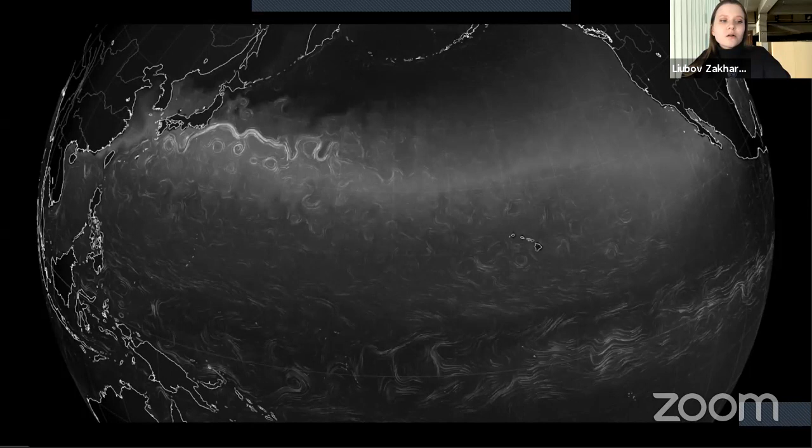The surface of the ocean is familiar to humans. Long in our history, humanity explored this world through sailing and learned about the currents and wind forces that exist in this incredible environment. Our project site is the dynamic and ever-changing Pacific Ocean, both its surface and its depth. We started by exploring the vertical and horizontal currents and how they interact with the wind forces.

However, this free and open space without national borders has been gravely affected by humans. The Pacific Ocean is where the world's largest garbage patch is located. Due to the directions of global ocean currents, plastic is being concentrated into ocean gyres. There are 5 major garbage patches around the world, 2 of them in the Pacific Ocean, and the one between Asia and North America is the largest.

This is what the garbage patch looks like. Plastic is one of the major environmental harms. This material cannot decompose, and only 20% of global plastic waste is recycled. The rest is burned, causing excessive CO2 emissions, stored in landfills, or dumped into rivers, from where it finds its way into oceans. It harms the ocean, marine inhabitants, our coasts, and all other living species that depend on the ocean.

According to a variety of scientists, historians, and ecologists, we're experiencing a 6th global extinction, where many species aren't able to adapt to the constantly changing environment. Plastic pollution is just one of the major issues causing this.

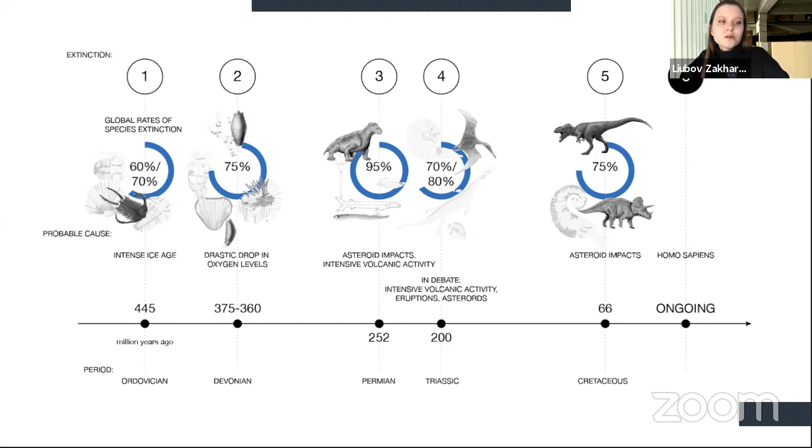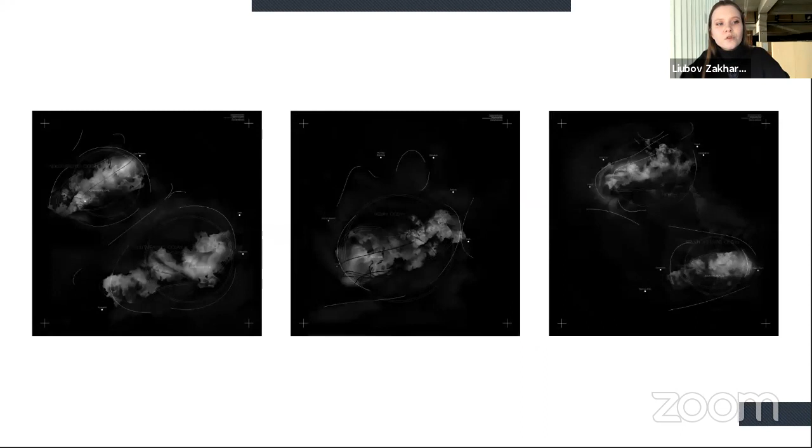Together, the garbage patches form a new continent on the surface of the ocean and create destroyed ecosystems on Earth. These are the 5 oceanic garbage patches in respective order. We modeled the patch in order to understand its mass and its density.

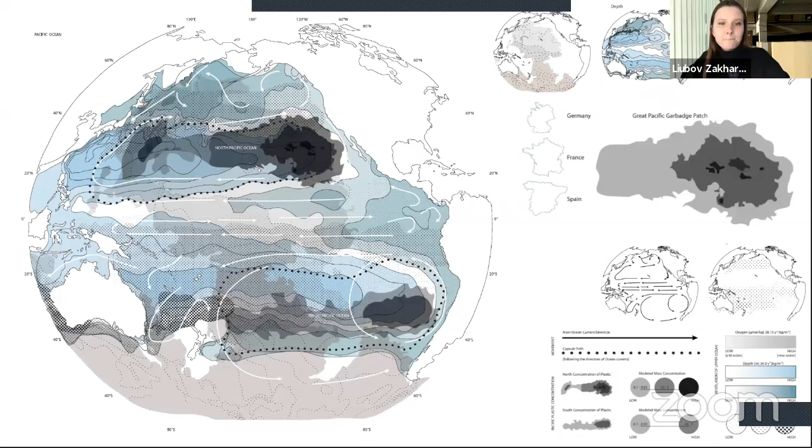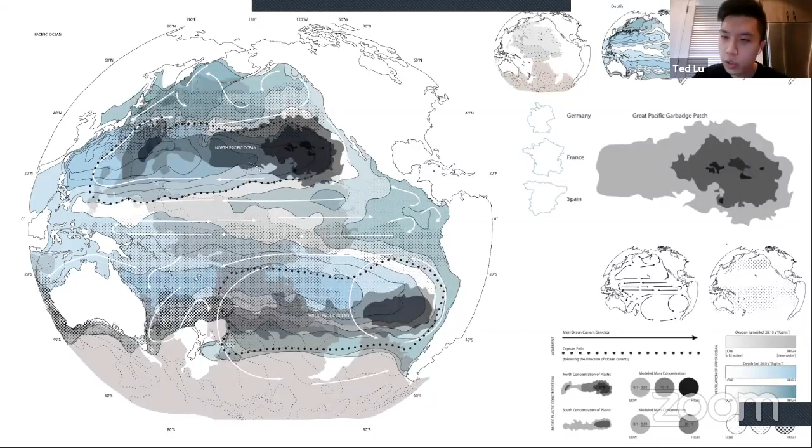The ocean is an interconnected system. The oxygen, depth, salinity, and current all affect each other. The concentration of garbage patches results from the current system, which can influence the local oxygen density of the ocean. When compared to Europe, the garbage patch is three times larger than France.

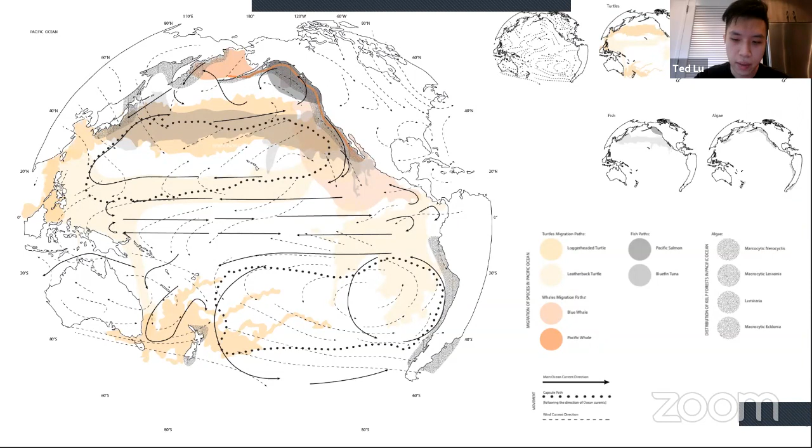Marine species also migrate through the oceanic system. Their travel path follows the local currents. Some of them have become endangered because of plastic pollution.

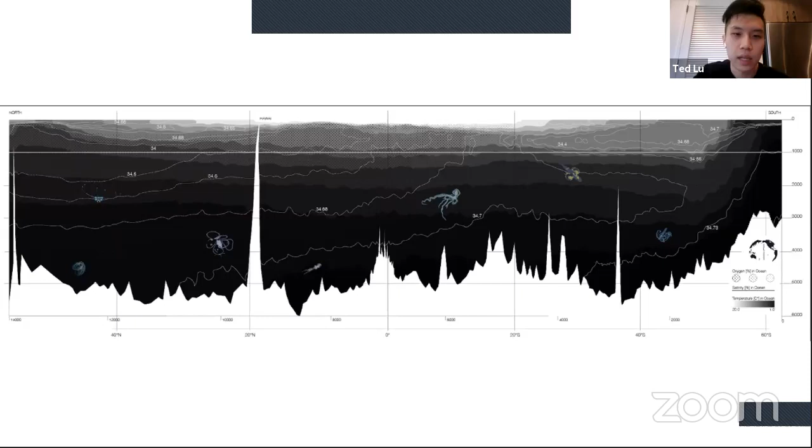Our mission is to clean and preserve the surface of the ocean for the species that need to be saved now, and explore the depths of the ocean for life forms we can learn from.

Our architectural proposition is aimed at resolving the issue of garbage patches by collecting ocean plastic and recycling it into building material on site. Our project is not static, it moves cyclically. The proposed project moves from the east coast of Asia to the west coast of America across the Pacific Ocean.

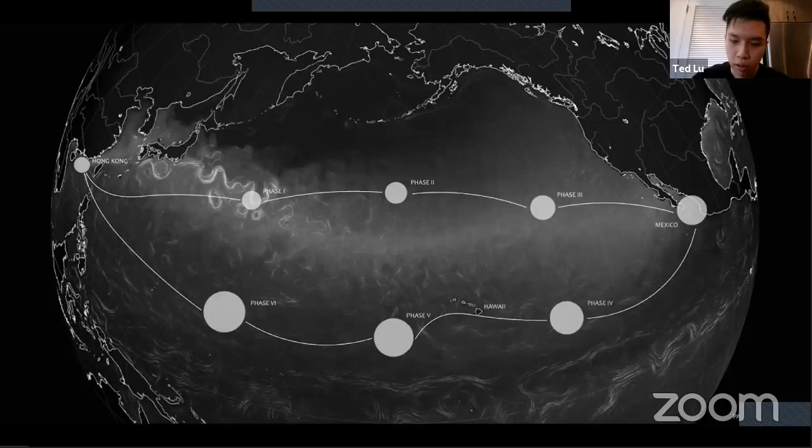We started by analyzing the 2-dimensional local currents and their motion, and transforming them into 3-dimensional forms. We created a simulated site to test how the capsule would be affected by currents, in order to study the performance of this capsule on water.

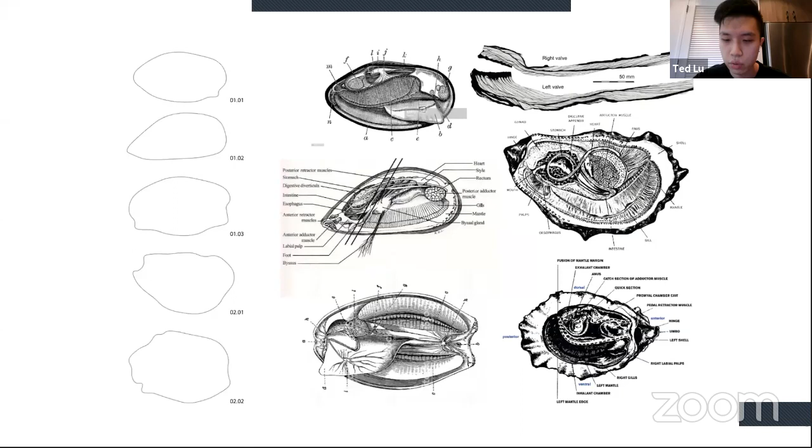Then we developed the interior space of the capsule. In order to develop the interior, we looked at the multiple layers of oysters. Each layer has its own function, which structurally holds the muscle in place and protects it from outer threats.

We hybridized the study on the performance of the oyster with a physical model exploration of the interior space, which resulted in oval capsules that shelter different living things, including humans, algae, and marine species.

The different capsules float at different levels of the ocean. Therefore, we integrate a vein ballast water system on top of the skin, which controls the buoyancy of the capsule by taking in or releasing water.

This technique comes from our experience with growing algae. We observed how algae is able to float vertically in space instead of laying flat.

On the right is a vein system when it's flat, and on the left is a system flowing three-dimensionally on the skin. The transparency of the vein structure was originally designed to create an area that could be habitat for a free relationship between two organisms, a photosynthetic microbe such as microalgae and a compatible microbe.

The photosynthetic microbe is able to convert sunlight to sucrose, which is consumed by the compatible microbes. Materials such as pigments and luminescent substances then form.

We learned that several deep sea species use bioluminescence to communicate, in order to attract prey or defend against predators. The same idea can be applied in a vein-like system to attract species we want to study, or defend against potential threats. To simulate this, we use quinine, which has the physical property of glowing in the dark. We then mix quinine with colored pigment to produce glowing liquid in different colors.

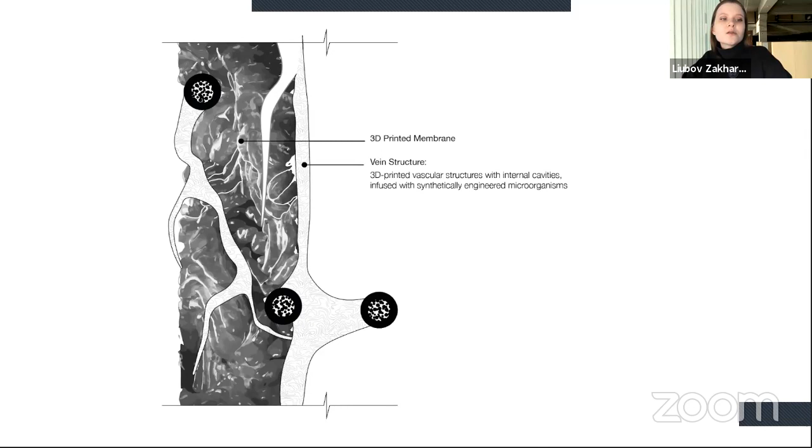This is a detailed wall section for architecture that will be created by the production facility. The two main systems will be 3D printed in order to create one constant. The first system is a thick 3D printed membrane, which performs as a skin layer that protects the capsule from the outside, while the other system is a structural vascular system, which blends into the membrane as well as wraps the capsule around, holding it in shape.

The second program is the farming facility. We will be growing algae and kelp in order to produce biofuel, food sources, and oxygen. Most importantly, algae will be the material that eventually replaces plastic.

Kelp and algae are grown inside another capsule that is inside the farming facility. Humans can navigate the space between the exterior skin and the capsule for maintenance, observation, and collection of the kelp and algae. The tunnels between the capsule and exterior skin also structurally hold the capsule in place. The white hatches become the heart of the capsule, which contains mechanical equipment that keeps the farm running.

We looked at specific precedents that recreate the surrounding environment underwater in order to apply the same technology to our programs.

The third program is the Endangered Marine Species Preservation Center. There are many marine species whose lives are threatened because of human activity and the plastic patches. The goal is to provide an artificial environment that mimics the original habitats that are being destroyed, and to closely monitor them and help them grow back larger numbers.

Sea turtles are the target marine species in this case. Again, there is a second capsule that is inside the Endangered Marine Species Preservation Center, which sea turtles and other marine species occupy. The relationship between the exterior and the capsule is similar to the farming facility, where the white hatches are the

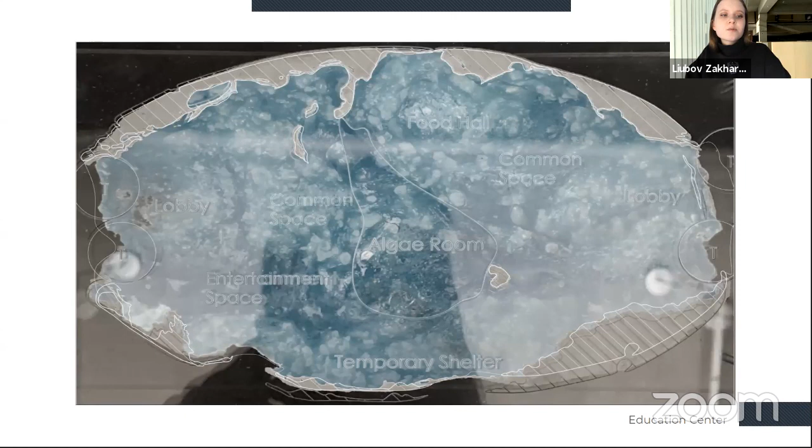This is the early form study section through the capsule that is inside the Education Center. We will be promoting knowledge of the oceans and teaching the public their duty to protect natural heritage. The education facility can also join with the research center to enrich the possibility of studying and practicing.

So we imagine our project developing in multiple stages. It will begin in 2050 with the production facility that collects the plastic from the patches and transforms it into different types of building material for the construction of other vessels.

Other programs such as the Environmental Preservation Center, Research Center, Farming Facility, and Education Center will be built in respective order. Several capsules can form a cluster which can join or disengage based on their mission.

By 2070, the ocean will be free of plastic. Farming Facility and Environmental Preservation capsules will be mass produced before the project ends in order to prepare for the next stage. After 2070, the farming facility will keep growing kelp and algae.

Our goal is to develop a way to replace the use of plastic with algae to completely eliminate plastic on Earth. Alternatively, kelp and algae can also be used as a food source or biofuel.

The research center also works as a connector to the education center, the farming facility, and the endangered marine species center.

This project is a cluster of vessels in international water that works together to benefit not only humans, but also other species that are important to this oceanic environment. We aim to detoxify the ocean by reconfiguring the material, plastic.

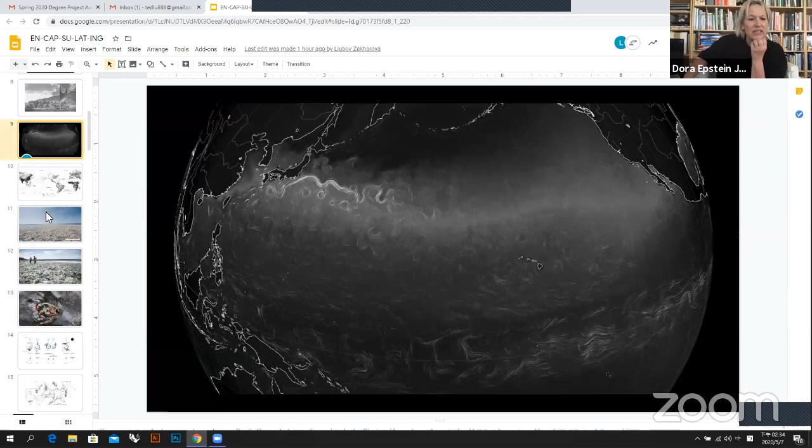So for example, if you go back—sorry, the slide that you were on—with the divers inside, it looked like Reyner Banham's bubble with the mechanization there. Yeah, that's it. The smooth exterior of this bubble—I don't know if smoothness is a kind of Western conceit of the surface of a wall, and the smoothing of the apparatus from the exterior. I think the biome, and paying attention to the biomes there, would probably mean that you'd have to make all kinds of little crevices, and there would be a kind of intricacy of the exterior surfaces.

Such that this marine life could be given these occupational territories that are on top of the mitigation of the plastic in that environment. And what's really cool about melting the plastic and reforming it is that it doesn't have to obey the surface tectonics and surface structures of, say, the Western imperial sense of smoothness. It could take on all of these—so it doesn't necessarily have to be an agate, right? A kind of geode. In fact, if you look at a geode with an agate in it, it's really crumbly on the outside. So I wonder if there might be an amenity to this project, but I think it might be an important way to consider the both-and-ness of the environment, both from the interior out and the exterior in.

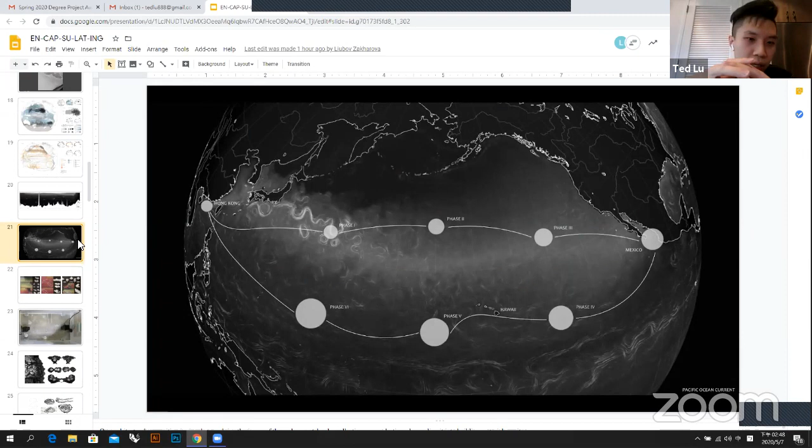In terms of scale, we calculated we need 16 vessels - Ted, can you address that one? To answer the question of scale, there will not be just one cluster, but many clusters. Each cluster includes a Research Center, Marine Preservation Center, and Farming Facility, and each will have 15 production capsules collecting the plastic. There will be a total of 20 clusters launched in 5 different plastic gyres. This calculation is based on the Ocean Cleanup project we researched. Our production facility is fairly small, but there will be numerous of them launched to the ocean, cleaning up at the same time. That's how this project will be done.

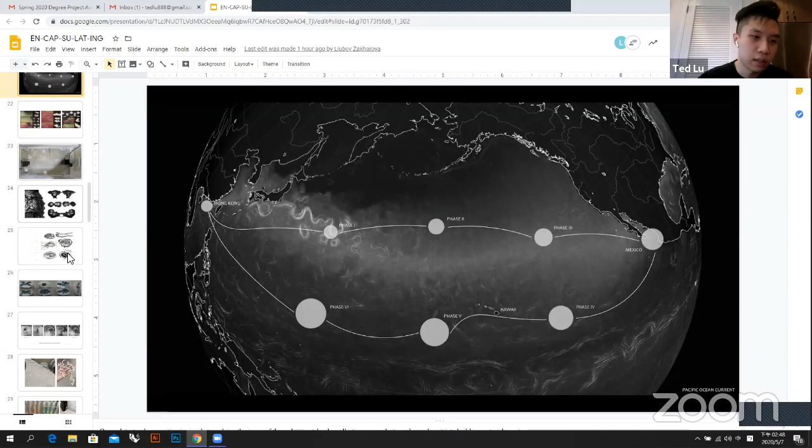The interior of the capsule itself is meant to be a safe zone for all species, including humans, plants, and marine species. The in-between layer is what protects them from outer threats.

I think the use of this egg-like shaped structure is very smart, because in terms of the currents and the thrashing this object is going to take, it makes for perhaps a more efficient and successful geometric form to deal with that. As most people have said, it's an amazing project, so I congratulate you on that.

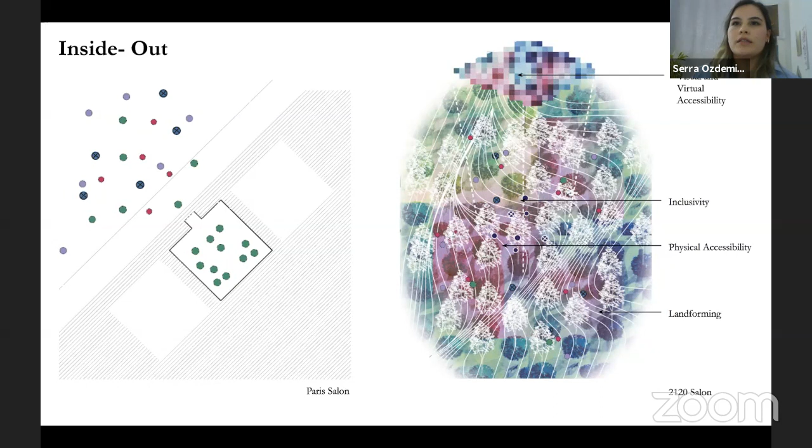The diagram on the left is a Gertrude Stein salon representation showing the hard boundary and exclusivity. The right is our inside-out proposal where we are exposing the salon into a landscape, creating visual and physical access to space.

The hybrid nature of our salon, mixing the virtual aspect to the physical, and after looking at the series of events, made us question the possible program possibilities for the 22nd century salon. With such motivation, we wanted to play surrealist games to explore programmatic hybrids that challenge the modes of collectivity. The programs have been pulled out from the salons we looked at in our research.

So what is our future scenario? Imagine the year 2120: there is no differentiation between gender, class, and sex. Although we become enhanced humans with multiple identities, technology is not enough to re-explore and determine who we are in the presence of the other.

So our 22nd century salon becomes a public space alien to today's time. It is neither a landscape nor a building. It is a scenographic landscape that seeks to heighten our social relationships. The project exposes activities of the salon inside out in a series of multiple grounds knitted together through landforming.

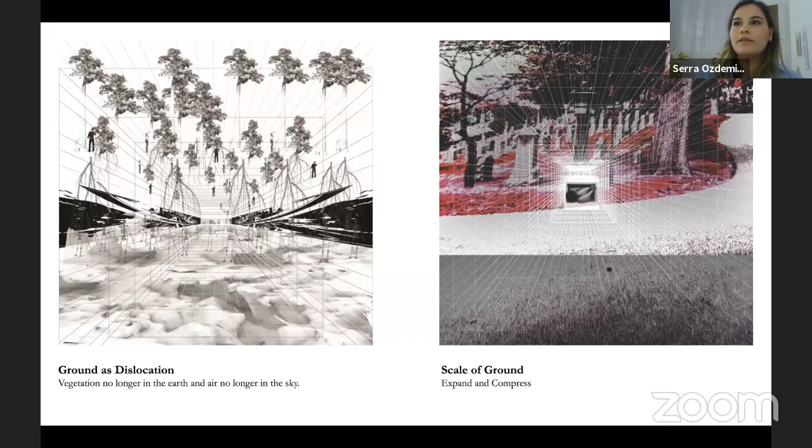We invested our time in understanding the multiplicity of the ground, understanding what different features it can have in terms of size, scale, and material. We developed our method in order to design scenes and generate new value. We use drawing as a design process to explore the multiplicity of ground.

As a first step, we analyze armature, landforming, ramps, and areas of occupation. In our interest to explore the multiplicity of ground, we produce experimental drawings that play with the idea of perspective and sectional splits between the physical grounds and the virtual grounds. Through creating this drawing, we found new spatial outcomes in terms of modes of circulation and occupation.

The drawing shows the possibility of the ramp flowing across the multiple grounds and always moving through spectacle scenes. The ramp becomes both a physical armature and a virtual one. For us, in the future, accessibility is for differently abled bodies, so ramps become conveyor belts with changes in orientation and trajectory.

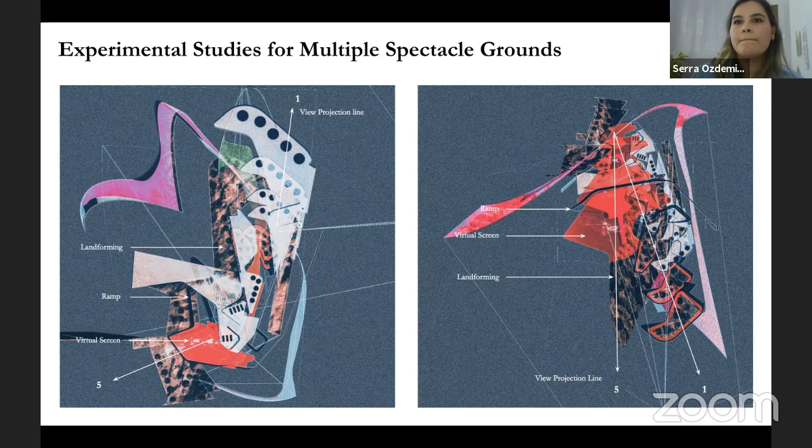So these drawings start as a design process experimentation, but end up becoming the design itself. They become the site of experimental nature where colors represent space for visual and participatory activity.

So as you can see in these drawings, the ramp engages between the physical space and the virtual space. This space specifically is called the imagination trigger, and it triggers imagination through participatory storytelling, collective games, and discussions that are going to be broadcasted in the virtual screens.

And also through the virtual grounds, we try to bring people together in the same space. For example, in this area, we're bringing people from different geographic locations so that they can input themselves in the salon.

So, evaluating the possibility of this drawing method to become the design of our 2120 salon, we further explored its integration as a whole at the site.

So we chose Randall's Island in New York City as the site of our project. We located the proposal on a site to give a degree of resistance to this experiment. The reason we chose Randall's Island is because it is a very interesting hybrid between an island that is highly connected in terms of transportation, but that has a history of being used to isolate people.

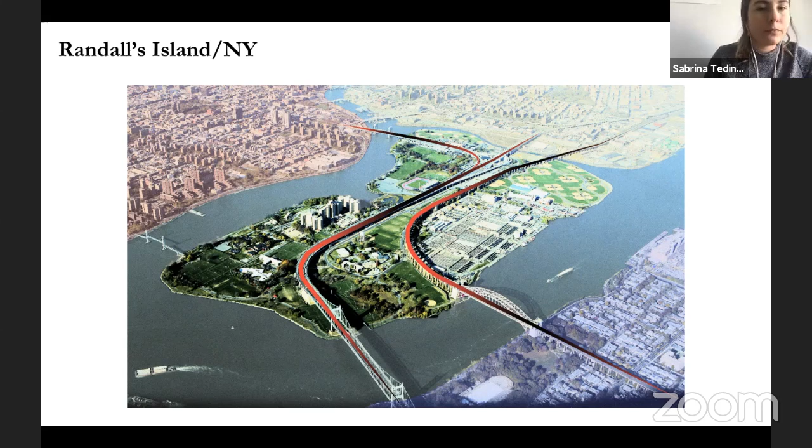So Randall's Island in the 19th century used to be a place for undesirable people where asylums and prisons were located. In 1992, RIPA was created in the effort of community growth and is a highly connected location, giving access to pedestrians, ferry, and buses.

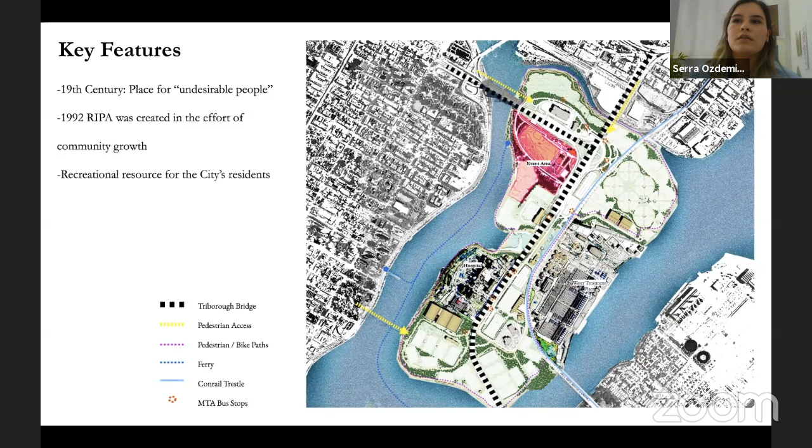We have read Dreaming Tongues by Stuart Munro, who said that the landscape is spectator and the island is the examining table. So Randall's Island becomes a location where we would create the experiment for our 2120 salon, and the mainland would be the spectator.

We want to acknowledge its past as a place of separation and turn it into a space that celebrates participatory efforts and community growth.

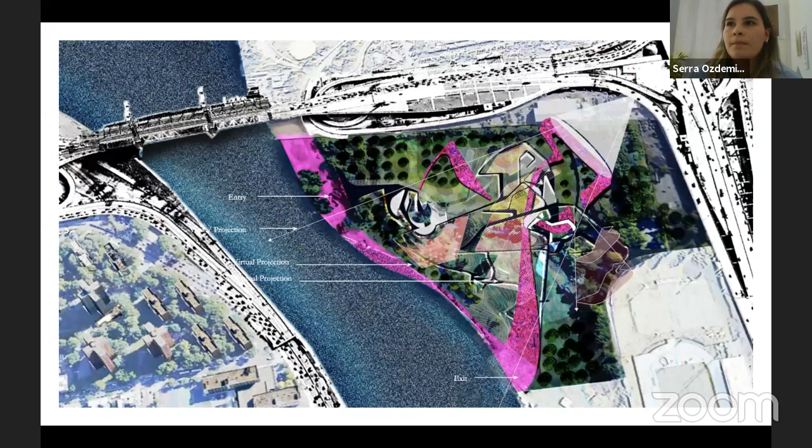So for us, it's very important to understand the relationship of our project to the imposing bridge of Randall's Island and its visual relationship to Manhattan. The virtual projections are created in the efforts to extend them to the height of the bridge and allow a wider visual accessibility to the mainland.

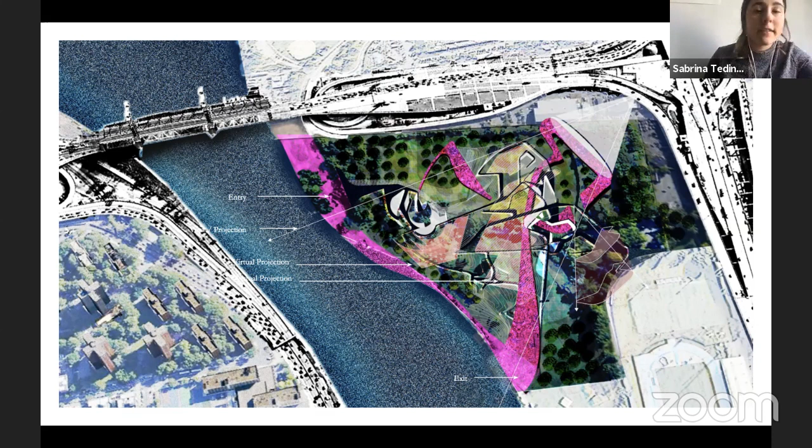As we mentioned before, this is a fitness test that allows the generative drawing process and design to evolve and change. This drawing shows how the salon can grow over time and reach the audience of the mainland. It shows the multiple forms of connectivity from the virtual inputs of the salon to the intersection between the bridge and the circulation of the salon itself.

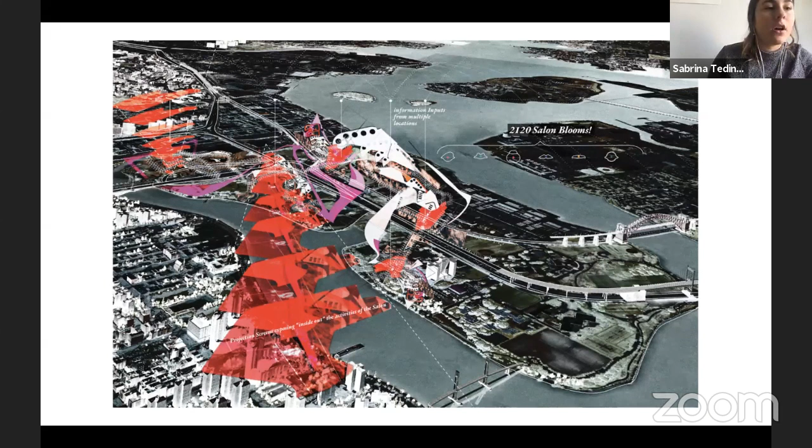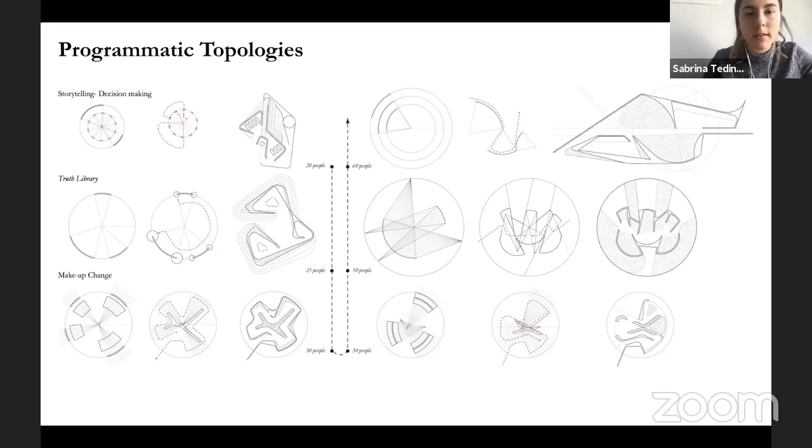Continuing exploring the participatory nature of the salon, we created programmatic spaces based on surrealist games and the amount of people that will engage in such spaces. So as you can see here, the change of occupancy.

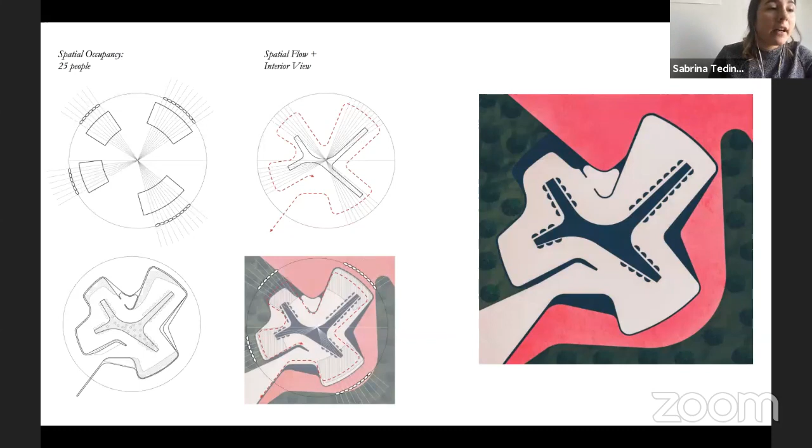What I'm showing to you right now are blown up examples of how the plans operate and begin to integrate with our scenographic logic of color, landscape, and ramp, suggesting the scale of the engagement and also the spatial flow.

So we are not looking at the conventional architectural drawing, and the spaces aren't a resolution of conventional architectural drawings. This space is called Zina Forest. It is the entry to the salon, our alien gate.

These are experimental logic works. The ground splits, creating multiple ramps as access points leading to the main activity area. The ramps also flow outwards into the next salon events. Different shades of color represent forms of occupation.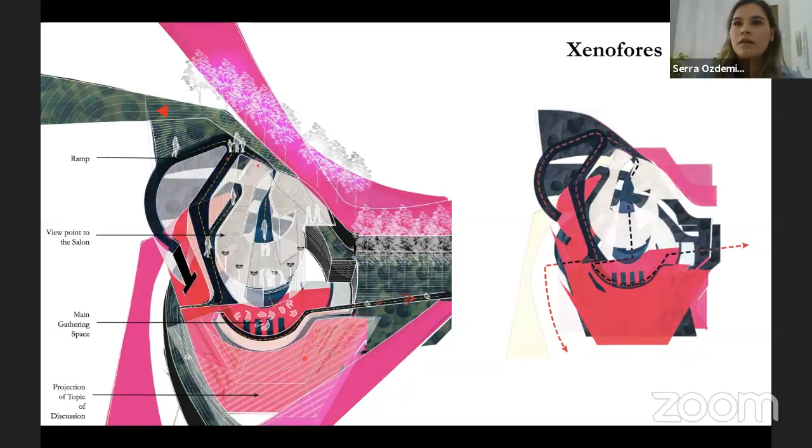Here is where the visitors are first introduced to salon topics of discussion projected on the virtual screen. This place is called Xeno-ID. This is the space where occupants have access to technology.

In this study, the ground splits and the ramp flows across space, making it the main programmatic location for this space. The ramp becomes a personalized assembly line where occupants can physically transform themselves into their desired self. This process is the very bloom of the salon, and because it's such an important space, it is meant to be seen physically and also virtually through the projection screens.

This space is called Xenotalk, and it is a multi-purpose space for performances, discussions, and entertainment. Multiple participatory activities happen simultaneously in this space at different elevated grounds, all connected by a center bridge. The bridge is the key visual and physical access to the multiple grounds in this space, but it can also allow a program to happen.

So this view shows the porosity of the ground and how it is experienced in a way that every ground is spectacle.

Experiential collage represents how the screen and the technology can invite people into the space and create a conversation in Xeno-ID. To the right, you can see how people can start the transformation, whether it is by costume or prosthetic. A vision that in the future people can look as we progress into this digital era and new social relationships.

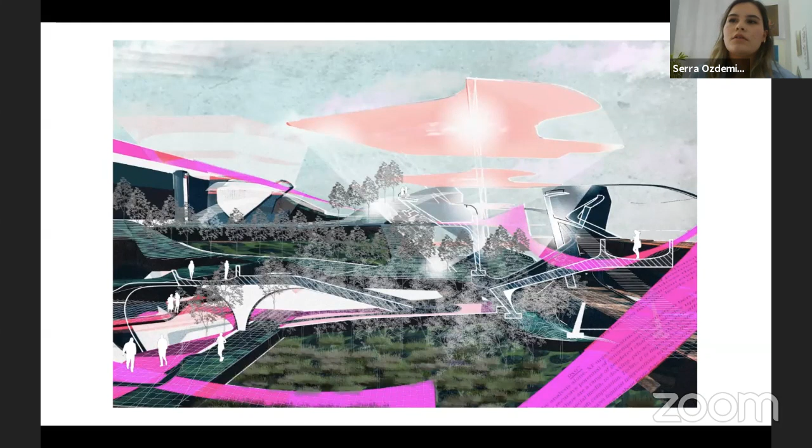This is a visualization of how the salon works sectionally using armatures to support the movement of the ground. So by designing a 2120 salon, we create inclusive and participatory public space.

The exclusivity of the salon is inverted by setting it up in a landscape scenario. The scenographic landscape allows us to connect people visually, physically, and virtually through needing multiple grounds to one another. And given the experimental nature of our project, even though we may not know what the future looks like, we do know that as our social relationships keep evolving and growing, so will our salon keep blooming. Thank you.

I'm gonna jump in because as soon as you showed this—sorry, obviously amazing work, but let's just get straight to it. But as soon as you showed this process of moving from the salon to this open space, I think—did you use the word landscape?

Yeah, for us it's scenographic landscape, but yeah, landscape would be the way that we're exposing the activities of the salon.

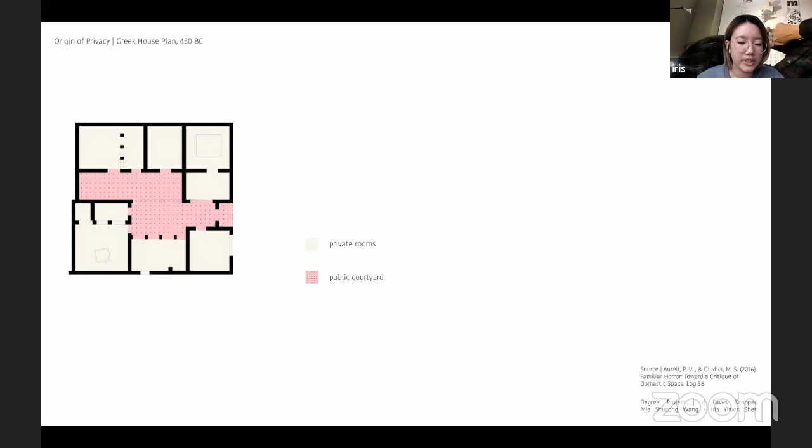Our current understanding of privacy can be traced back to the ancient Greek times. As shown on the plan here, Greeks are the first ones who established a clear distinction between a public courtyard and private rooms. As Robin Evans points out in his essay, Figures, Doors, and Passages, after the Renaissance, the corridor plan emerged and became widely adopted. The clear separation between room and corridor represents an explicit division between served and servant spaces. And since then, such thinking has been drilled into our mind. Privacy is guaranteed when we can enclose a space.

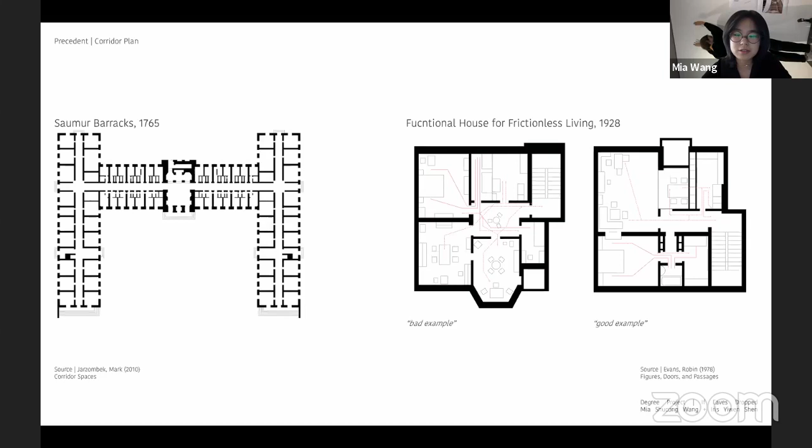Times have changed. Compared to past centuries, we are living in a more ephemeral way due to the development of technology. Transient privacy is a product of the digital age. The digital age is a technological term that emerged around the 1970s. It has profoundly affected the way we think about and discuss privacy, but has not been manifested architecturally. 50 years later, we're still talking about the duality of the online-offline world, but have not matured our formal ways of understanding it.

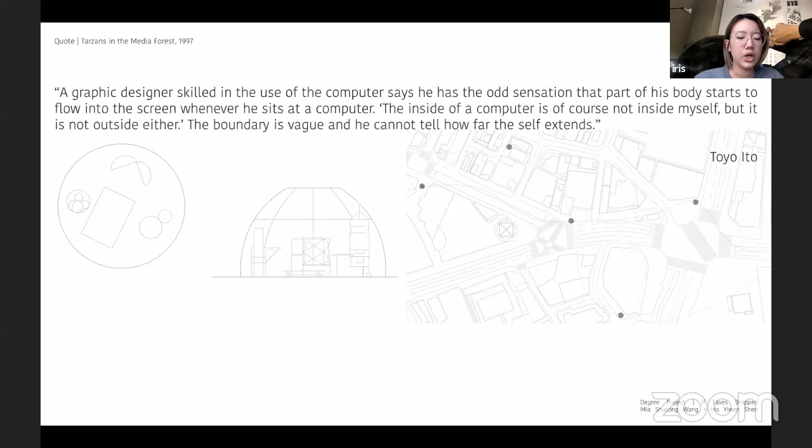Here's a quote from Toyo Ito, where he wrote in 1997, discussing the new but strange sensation of being connected yet separated.

And this precedent is by Toyo Ito. He's proposing a new type of housing for Tokyo girls and imagining a new nomadic lifestyle for them, who spend their daily life in boutique shops, restaurants, or coffee shops every day. The architectural form is a retractable hut with only 3 pieces of furniture inside, including essential needs. And all the pods dispersed in the city are interconnected by signal and information.

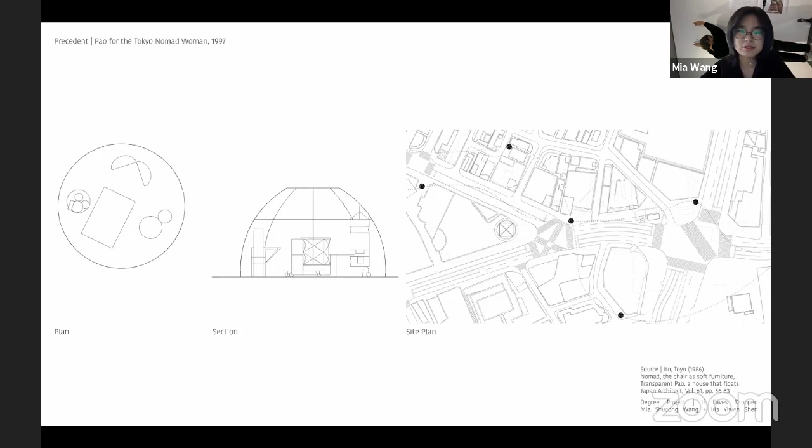The internet has revolutionized our way of thinking about boundaries in relation to privacy. One became increasingly comfortable in extending oneself through sharing information with strangers online. That is to say, one's boundary could change tremendously and swiftly in the virtual world. However, such acceptance of a much more negotiable boundary has not yet reflected architecturally in the physical world. For us to rethink privacy in the new context of the digital age, we must break ourselves from the binary organization of room and corridor and formally express how transient privacy affects the way we live.

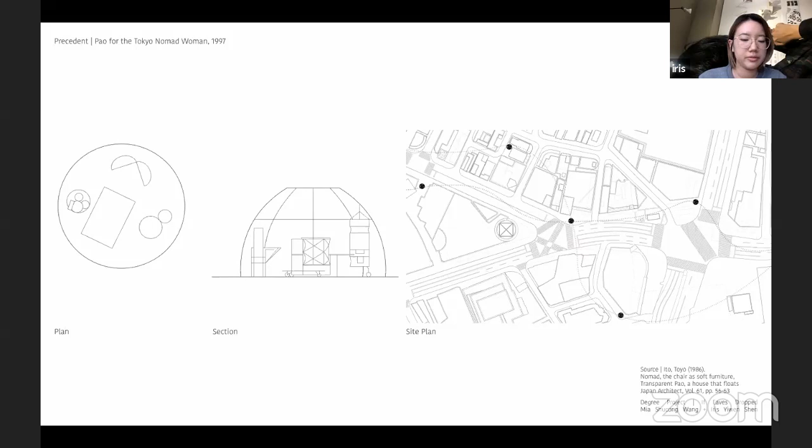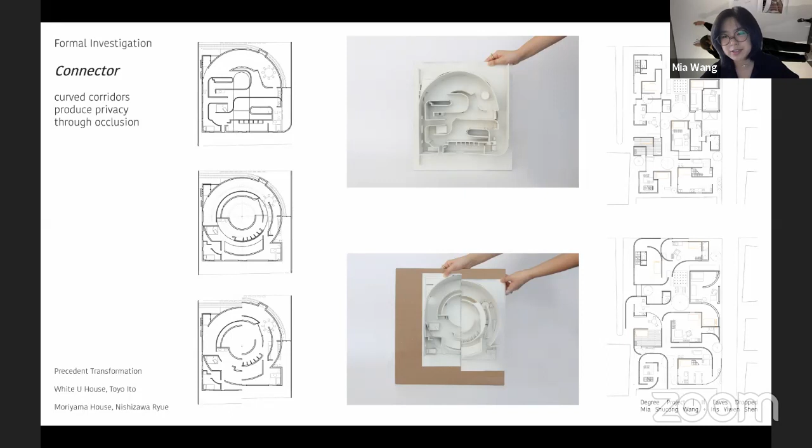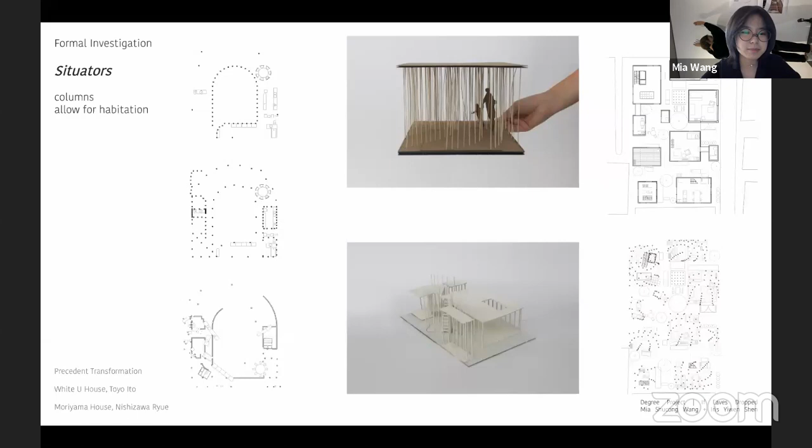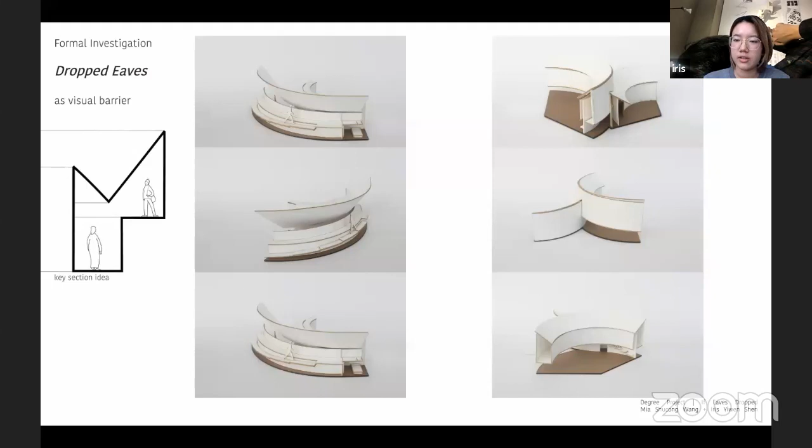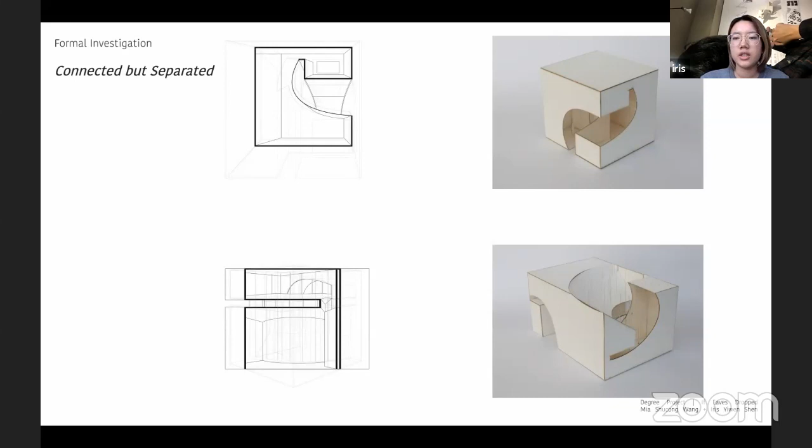This is also an early study of topologically connected spaces. So in the photos of the models here, you can see, even though it's seemingly separated on the ground floor, it's all connected on the top floor.

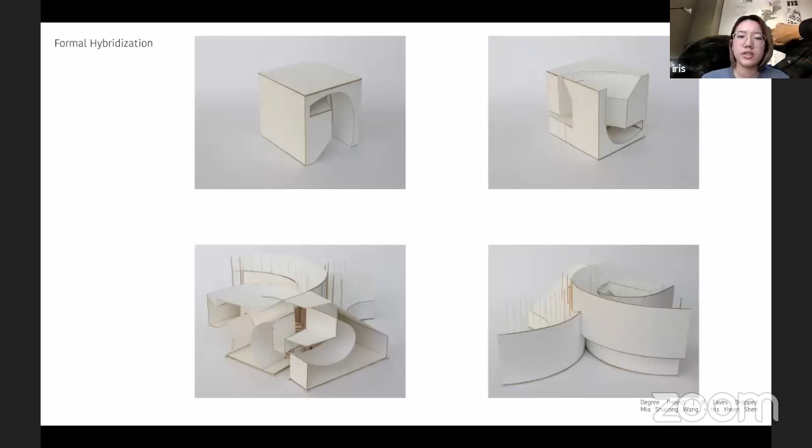These are our early hybridization iterations where we're trying to combine connectors, situators, and topologically connected spaces, all three ideas together.

For our choice of site, we chose Tokyo, Japan. Japan is currently experiencing an unprecedented rate of aging population. In Tokyo, a majority of senior citizens are living in the suburbs, which are outside the core of Tokyo. Due to the extreme isolation provided by individual houses, a phenomenon called lonely death has emerged.

So that's why we're proposing a co-housing prototype that brings these two populations together. In terms of the site, we chose Omori, which is at the transition zone between the urban and suburban areas of Tokyo City. Even though it's relatively distant from the city center, it's well connected by the public transportation system.

So the site has a relatively steep topography and acts as a connection between the main commercial street and the smaller residential streets at the top of the hill. Considering the quality of arcs, we are proposing two large-scale arcs that are

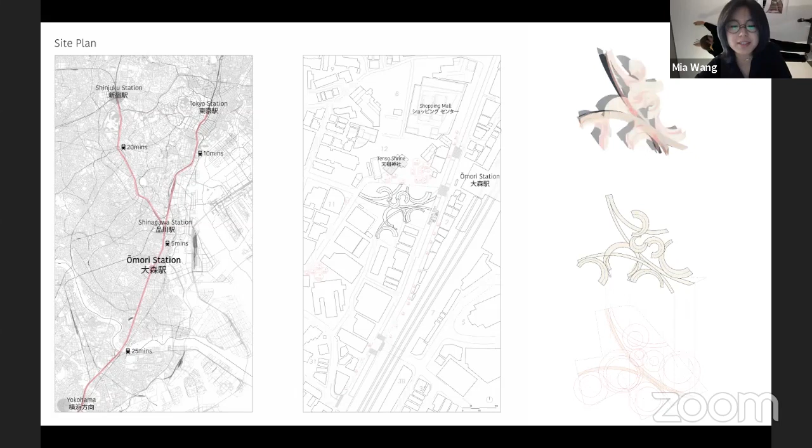used as a gesture connecting the three endpoints on the site. The two big opposed arcs allow for a relatively large influx of people coming out from the train station to take the shortcut up to the hill. Smaller scale arcs resting alongside the big arcs are for the residents.

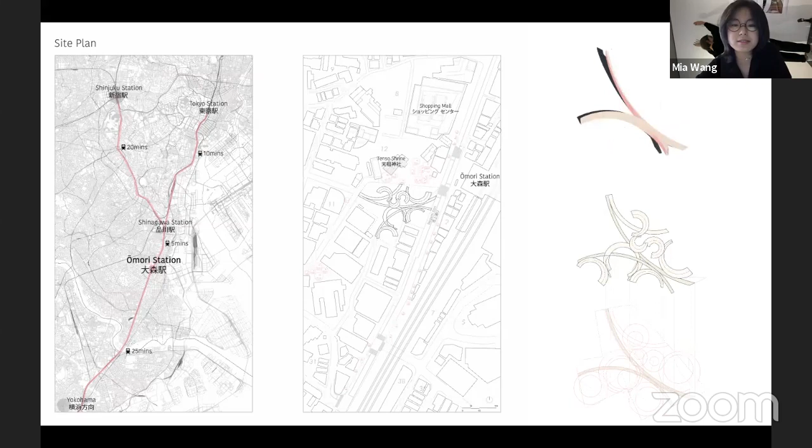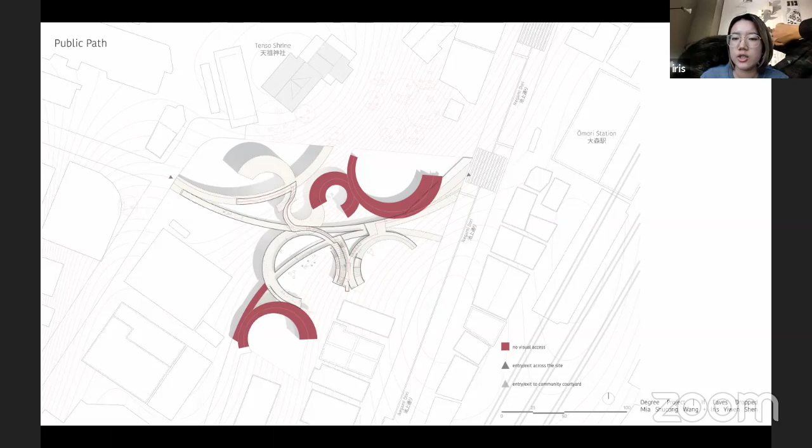First, let's take a look at the project from the public's perspective. On the right-hand side, you can see the Omori train station we mentioned before. There's going to be a large influx of people exiting from the train station. After they cross the street, they get onto our public path of the project. At the bottom here, you can see a branching out of the path, leading to the community courtyard.

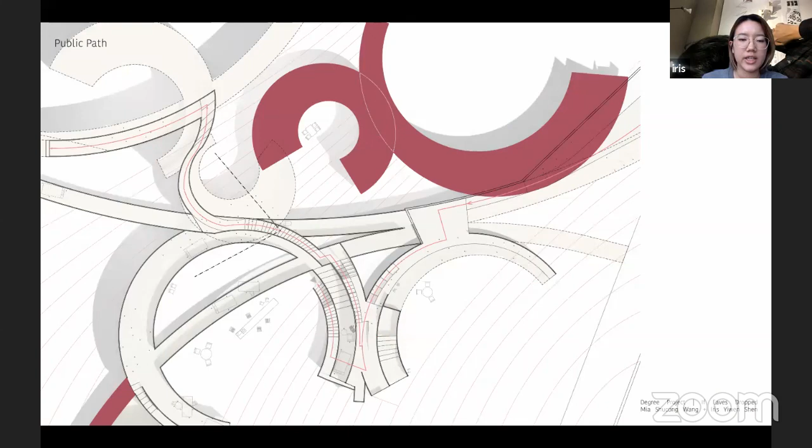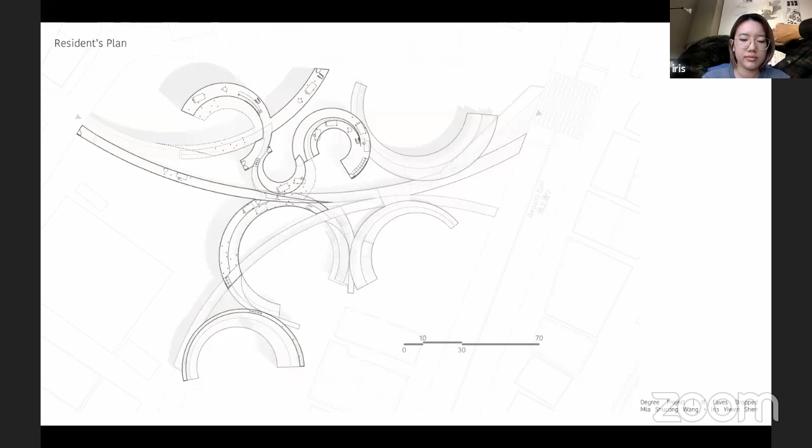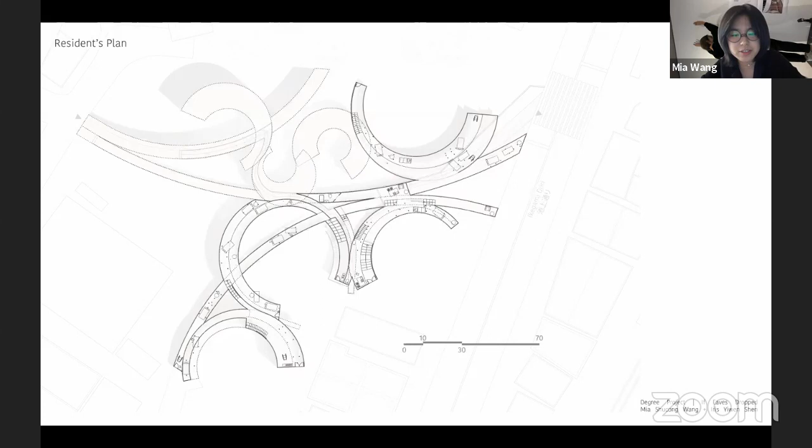This architectural form addresses both continuity of spaces and the separation between activities. Curved spaces act as connectors, inducing movement, while columns act as situators, allowing for habitation. The connectors intersect with each other tangentially, and the intersection allows circulation to flow from one connector to the next seamlessly.

So on this plan, you can see segments of curvilinear spaces utilized as individual bedrooms, all connected without doors or any form of walled enclosure.

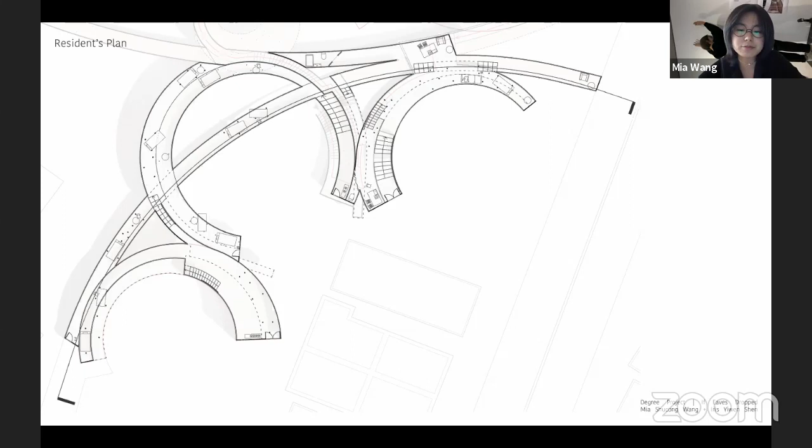And in this section, you can see one single room can be entered from the tip of the big arc, and there are a group of rooms inside the smaller arc behind the big arc.

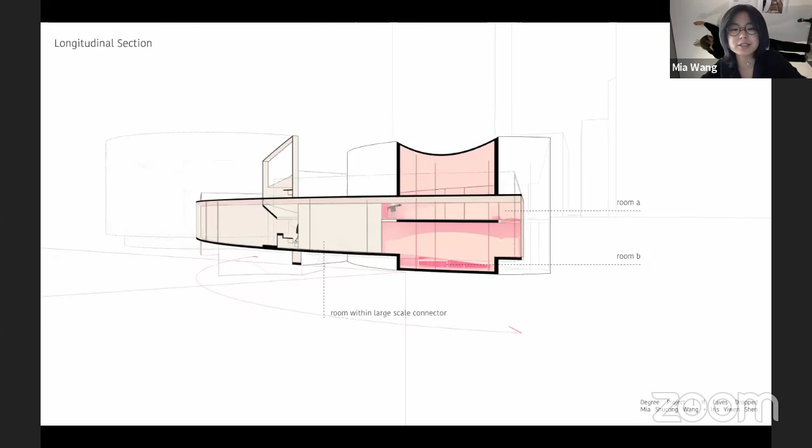Residing in this type of housing, people's visual experience is interrupted by the curvilinear geometries, such as walls and dropped eaves.

For the geometry of privacy, the more isolated connector is narrower—you can see to the left, the more isolated connector is narrower with a large radius, and the intersection is distant from the inhabitant—versus in the more connected room to the right, where the space is wider with a smaller radius, and the geometry easily intersects with other massing.

For the columns, besides acting structurally, more importantly, the columns perform architecturally. So conventional bedroom furniture pieces are organized in relation to the situators, weakly suggesting zones of privacy.

For the operation, we are dividing each arc into zones, and only three columns are placed to situate one piece of furniture.

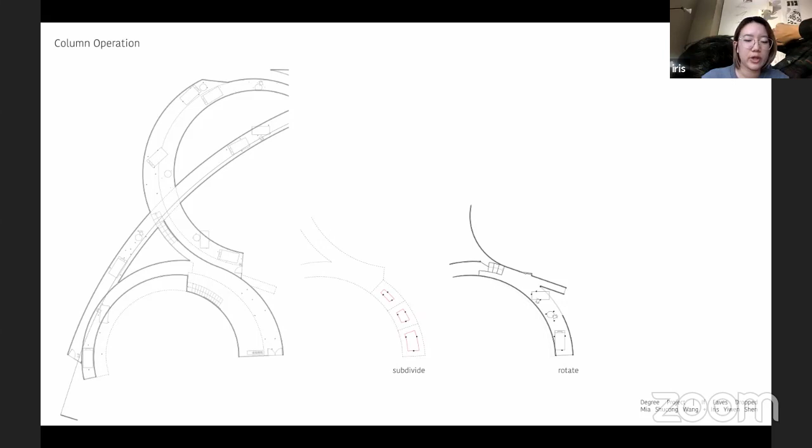Before we finish our presentation, please join us now for a virtual tour around the building.

When a resident lives in this house, she enters from a door located at the tip of an arc. She walks along the curved wall for a few seconds and finds her own furniture nesting between a few columns. She looks up as she walks towards her bed.

Sunlight beams through an aperture where a few roof surfaces come to an end. Then she looks down at the stair leading to somewhere, but the destination seems hidden behind the curved trajectory. She hears some light footsteps as she finally leans against the backboard of her bed.

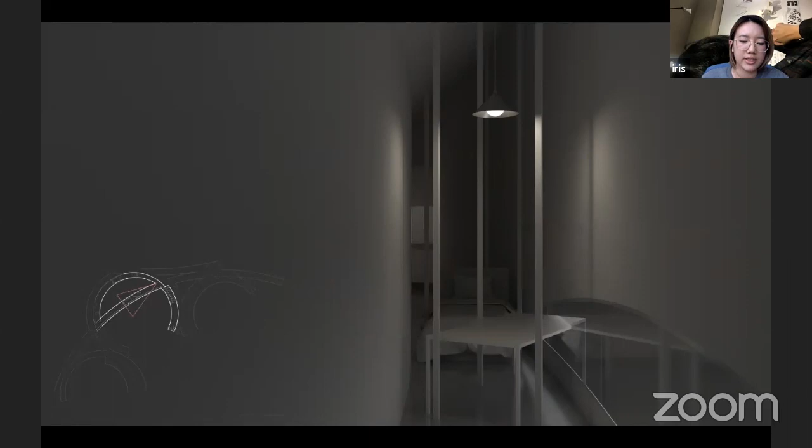She moves around on her bed for a better view, but the curved wall and slanted roof prevent her inquiring gaze from entering the space. She begins to wonder if anyone else is here.

Soon, a sudden laughter echoes in the space. Someone's in my room, she thinks to herself, or am I in someone else's room?

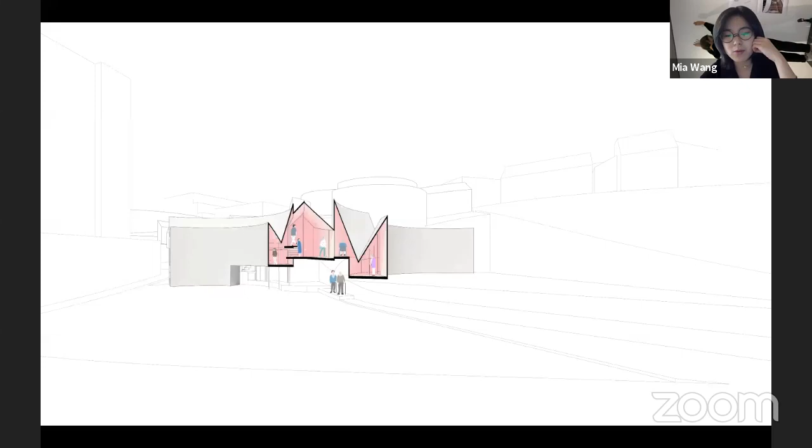Instead of defining a clear boundary of one's territory, the sense of ownership in this project is built upon one's accumulating experience and sharpening sensibility of scale and location.

The interior experience is mostly homogeneous. It's hard to determine any exact location of oneself in relation to which part of the arc one is occupying at the moment. Such a sense of spatial ambiguity creates a delay of acknowledging one's own living condition.

In our project, for all the residents, isolation is always a state of relation and could be intruded at any given moment by others. Perhaps there is no stage of being alone, but a transient sense of being separated together.

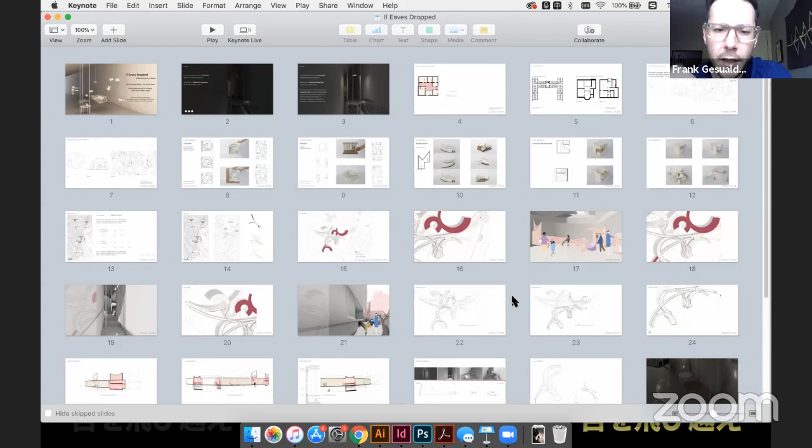But maybe just, could I ask you, at the end of your presentation, if you could somehow tie it back to the thesis? One of the comments I would make about the presentation style is that there seemed to be a hard line in the way you delivered it between research and proposal. Sometimes the best arguments are the ones where you can't tell the difference between the building up of the conceptual argument and the answer to that argument. I think oftentimes those two things want to blend into one another and become each other, in a much more knitted fashion. But here it was like, okay, I've done all my research and now I'm going to design a building, and that's kind of what it felt like.

I just wonder, to counteract that a little, could you somehow tie this back? What was Robin Evans's argument about the corridor? How does this prove out his argument, or refute it? Does it extend the argument? What's the relationship back to the body of research that you did initially to kick off the project, before you took us into the site research and so on? Is there a culmination of thinking that this now delivers for you, in terms of the conceptual argument you started with?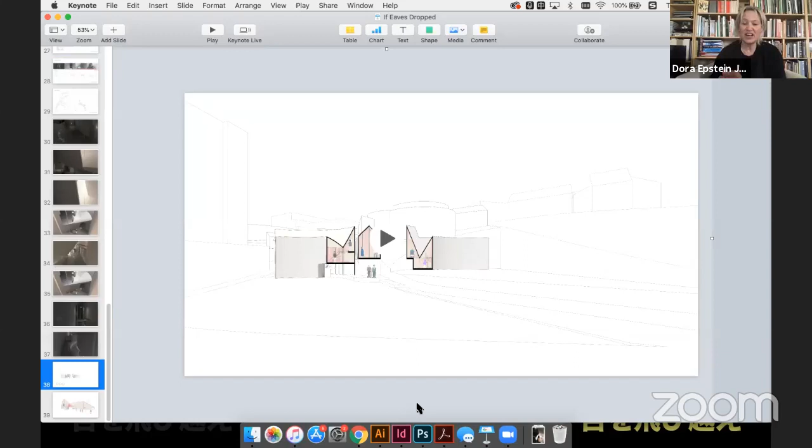I think at the end you had a couple of sectional views. Yeah, so see what I mean by it being kind of hermetic and closed, and you can see that in this. There's not a lot of articulation at the ground plane. It is sort of like the Snowpiercer train in that sense.

Yeah, you kind of get this weird space underneath where you bonk your head or something, you know. And the thing about the Bong Joon-ho film that's interesting, or even the Upside Down in Stranger Things, is that there's this sense that there's a kind of the people who, have you seen Tales from the Loop, right? That's another kind of interesting provocation of spaces that are real, whose reality is constructed by taking care of those within that reality. So Tales from the Loop is a kind of good example of that. And Parasite is also a really good example of that. And so caretaking in that sense means supporting that reality.

And so there's all these kind of weird other spaces that occur in and around it that have half spaces, or like in Parasite, their weird bathroom where the toilet is kind of sitting on that weird plinth, and they're sort of underground—it's a Dostoevsky kind of rehearsal for the 21st century.

And I think there's an opportunity to inflect your care space with those kinds of secondary, tertiary weirdnesses that will come from a world of all passages. Like in Snowpiercer, there are literally people living in the wall of the train, and then they find those people occupying those medium spaces in between.

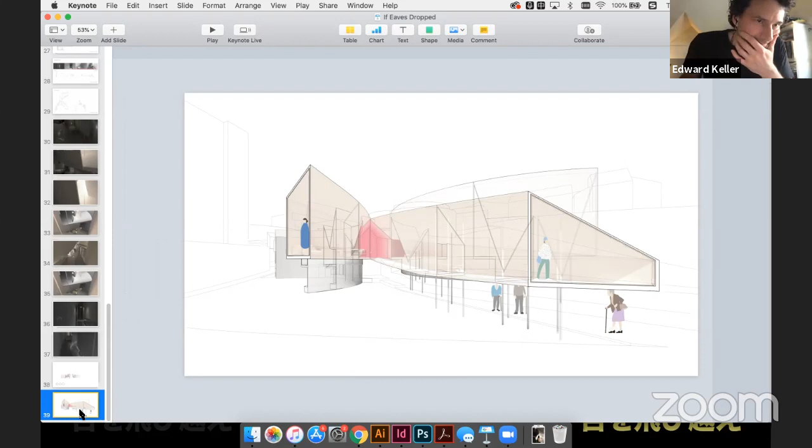And it's so interesting to rub problems the wrong way to see what happens. Ed, you phrased the core of my critique really beautifully—if you've ever spent any time caretaking an elderly person, this environment is incredibly traumatic. It just is. So what do you do with that? Do you say this project reveals the limits of architecture to actually help in intergenerational cohabitation? Or that it forces those questions? Or that it's on the verge of some brilliant realizations it needs to go further with?

The answers to that, I think, really differ between whether you put on the speculative lens or the functionalist lens. Maybe there's even a hybrid of those. But for example, if you simply take this as an urban proposal, the bravura of the form on the urban landscape vis-a-vis the experience of the interior spaces, to me, does not make sense. It is as a provocation—

And so again, I think it's a really accomplished piece of architecture. I just don't think that it aligns with its own hypothesis, which is to say, let's overlap spaces for intergenerational cohabitation.

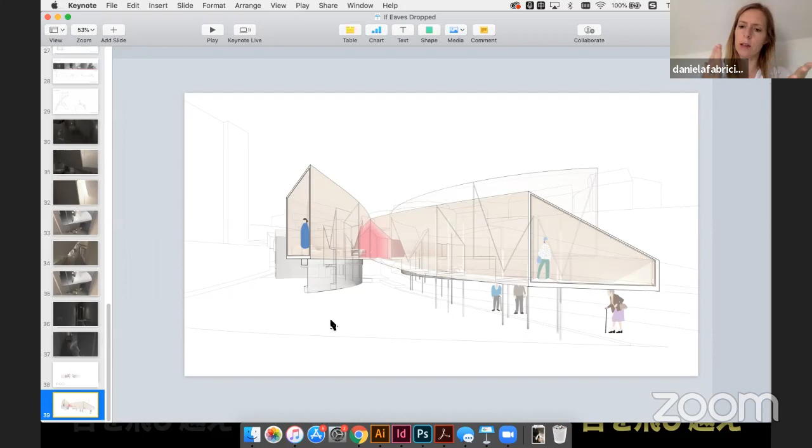I don't take issue so much with the private-public issues. I do like how there's a kind of intimacy, blending, separation and coming together. But I also think about what these bodies are like, these aging and sick bodies, and what they experience, and the space seems deliberately meant to provoke, rather than any ideas of comfort or a humanist approach to design. That's what made me think of Peter Eisenman's split bed and the columns that hover in front of you when you're eating dinner - meant to be uncomfortable and provocative, against functionalism, against humanism. So you have that quality to your project, but I think some of us still don't quite understand why, because it's separate from the private-public thing. Why that way of designing space for those bodies?

I think actually for us, the form itself is more related to our thesis. The site and the population actually came pretty late in the process of doing this thesis project, so maybe that's why it looks like we didn't really consider the senior bodies that much.

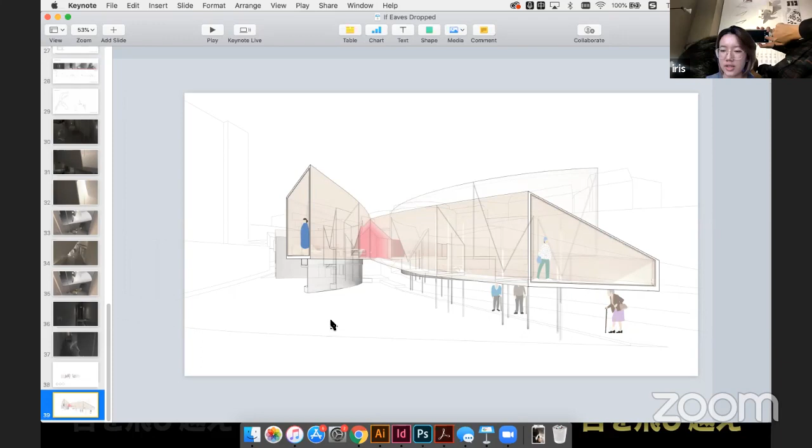I think also a question would be how many people can this space accommodate, because I'm thinking of privacy - privacy has to do more with visual connections and distances, let's say. So I'm wondering if you've thought about how many people can live there, or if you already mentioned it and I missed it. This spareness is a very luxurious idea - you have privacy if you're further away from the person, even if after a point you don't see him anymore. So I'm wondering, is this meant to be a very luxurious place? Not in terms of materials, but in terms of how the more space you occupy, in a way you could say that's more luxurious.

I think there are currently about 25 to 27 people in this current iteration. We did have a couple of conversations about this being pretty luxurious, formally, and also from a real estate point of view. But because we chose to deploy such curvilinear ways of defining and really exploring the opportunities between privacy and curvature, that's why we went down that route and really tried to see how we can achieve privacy without any enclosure, and how we do that with this form.

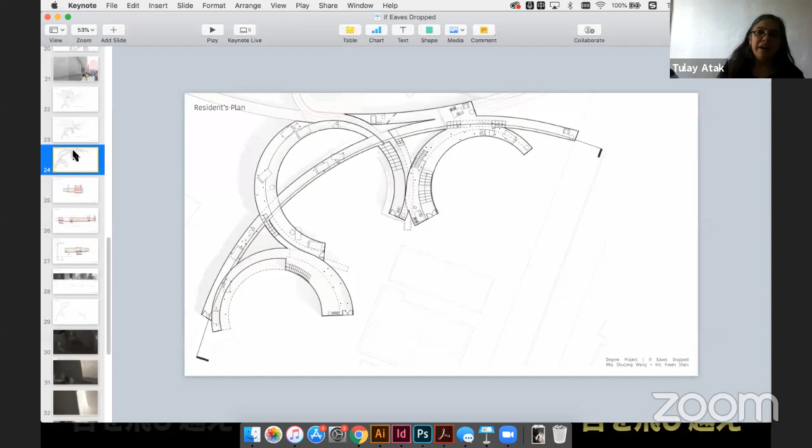So maybe I can jump in here. I have a few comments and critiques of the criticism itself. One is, I'll say it straightforward, I don't find the word functionalism useful here, and I don't know what's meant by it. I think maybe there's another word, as problematic as that one, that can help us reflect on the project - I would say it's some kind of realism. Not realism in the Russian Stalinist sense, but a realism that you would find in the spaces that they are creating. I think Iris and Mia are somehow committed to that at the end of the day.

So when the question is, is it really old bodies, how will we care for them - I think that's incredibly relevant and important, and it's a question they should be hearing. I also think the body they are thinking of is not necessarily a body that needs care, not necessarily a young body, but a body that's in between - a lonely body. That's the problem they are dealing with. So while there are issues that can be explored, and I think where the criticism is right, they could potentially push the project further in determining the sizes of the spaces, the distances, the passages, and how passages happen.

I think that's also one point, definitely a decision for you guys to make, whether you want to take it in that direction or not. But if I go back to this question of realism, a realism of the spaces that are being created, I think one thing that's not necessarily coming across so much in this conversation.

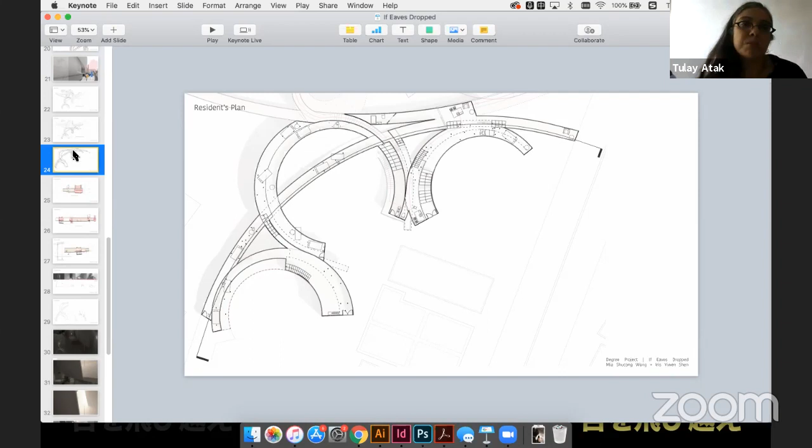For instance, I'm bringing the conversation back to architecture, because it's also something we haven't really had a chance to discuss. We have discussed your presentation, we have discussed other questions, but maybe the way you would start to make your provocation, Iris and Mia, is by going back to architecture and what kind of problems you see in, let's say, the tools of space making that we have.

I don't know if that made things worse or better for you, but is that a rhetorical question or should I actually answer it? Decide. You can, I think it's best if you try to answer or say something.

Throughout this, after reading Robin Evans and also other essays like Corridor Spaces, I think the problem here is not taking care of an old body or what kind of spaces are for taking care of old bodies, but rather our understanding of privacy should change from era to era, from time to time. And what we think is that our understanding or acceptance of privacy digitally is very different from how we understand and experience privacy physically. And we do think there's a gap in between those, and we think architecture should catch up that gap, because when we're online, we have a much more flexible boundary or understanding or acceptance of privacy, while in real life, we don't even think about it.

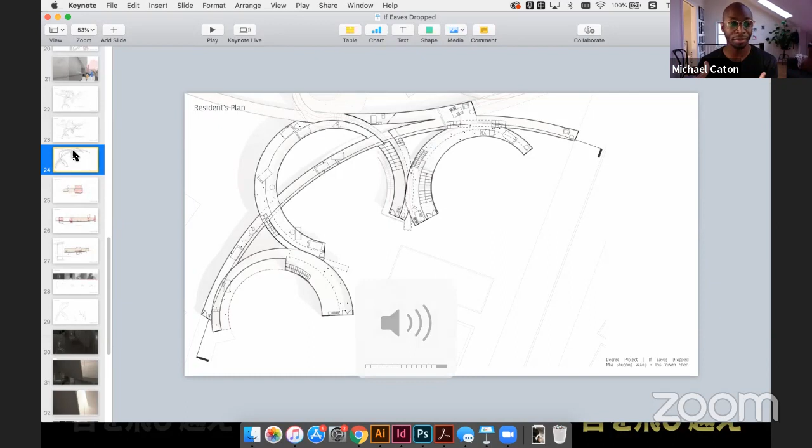I think picking up on your response a bit, I think they're like very different conditions of safety in the digital realm versus the physical realm, that you contend with, and the kind of way that we culturally engage in the digital space with respect to privacy versus in our physical spaces. But I think then to your response, what has yet to come across, I would agree, I think this project is both anxiety inducing for myself, but also very beautiful.

What hasn't come across in the presentation though are the spectrum and range of programmatic activities and this unpacking of how that begins to relate to these conditions of loneliness and connectedness and the relationship to privacy. I think it's tough to gauge how successfully the current manifestation of the proposal is grappling with these issues. At least looking at this plan here, the Resident's Plan, by just seeing bits of furniture scattered in these arcs, I think it's just not quite coming across how you're grappling with the real nuances of that.

I really do like, to Tulay's point, that in this project we can really dig in on a super specific problem. I love that. But then I would also hope that we can begin to see through the presentation how you're beginning to unpack and address these different conditions in a nuanced way: virtuality, physicality, safety, and dealing with the issue of age and the ableness of differing bodies.

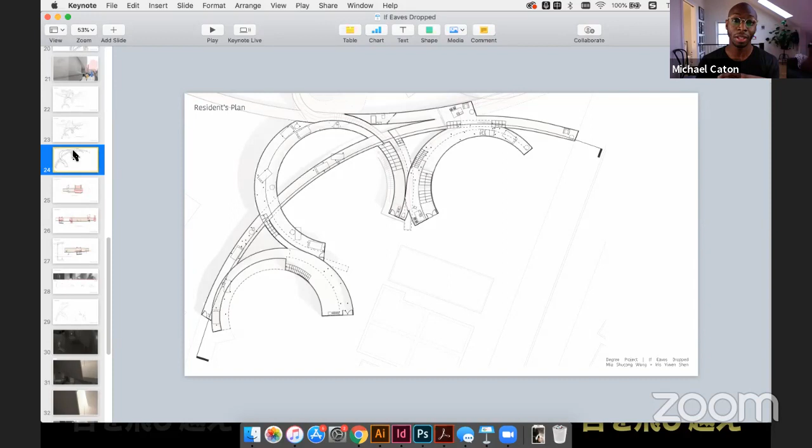Where do you bathe here and how does that work? Can someone always walk up on you while you're in the shower or bathtub? Maybe that's actually a positive thing for someone who's really elderly and needs easy access to care. Well, maybe that's something that's quite daunting and challenging for a family of four. And how do you negotiate that?

I'm not criticizing the project for not successfully resolving that, but I think you can ask these really focused questions in the beautiful explorations you were doing. The models you produced were really gorgeous explorations, thinking about these forms. And I think where you landed, some of that richness, especially in the section, has been a bit lost, but the conditions where you utilized a lot of what you discovered there are very much present.

Any last remarks, comments? I think we're good, right, Tulay? I just asked if anyone wants to make a last comment. I was mainly asking Ostap.

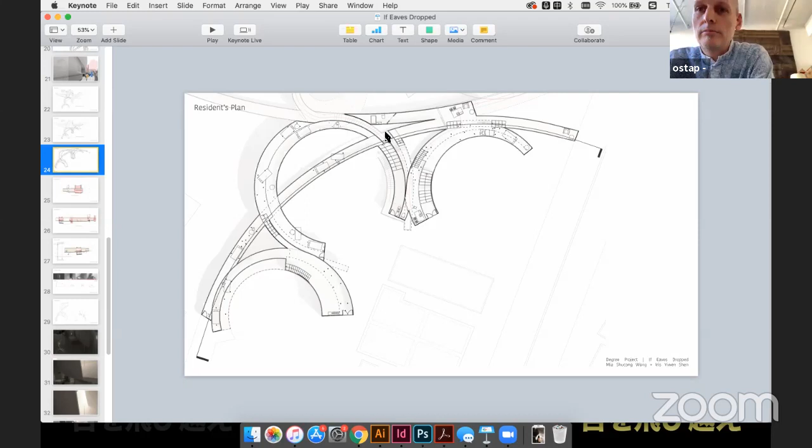And very much same here. And Eva, do you want to do the last, or should I just go ahead and end this? Yeah, I think we just say thank you to everyone. I don't know exactly how this all-school happy hour thing is going to work, but students should definitely log on. I don't know if the critics got it, but regardless, thanks to everyone.

It was an awesome day. Given the environment, it was better than I could have possibly imagined for me personally. I'm sure Cathryn, Tulay, Ostap, and Eva feel the same way. Did Gonzalo ever make it or no? He didn't, I guess. He had an appointment, so maybe he didn't make it back in time. Yeah, oh well, Eva, we have the recording.

It was fun to finally be in a section with you. We're always plotting to see each other's work, and the schedule seems to work against us. And Tulay, it's really nice to see the project from your section. There's some interesting common denominators here too. I see Tulay and Ostap with the public-private questions that your project raised. And of course, Eva, I want to talk to you more later. We'll have a chat about things, but I just appreciate the jurors today and making maybe a few new friends.